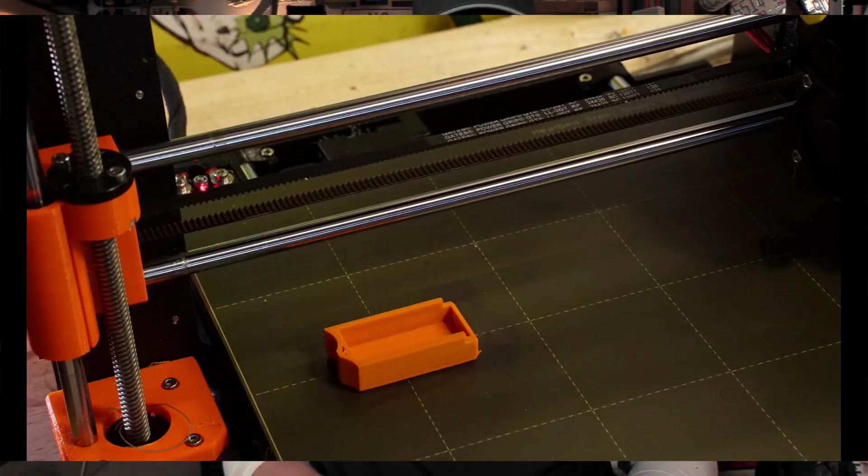We are going to be making a rig, some 3D printed parts to do time-lapse photography of your 3D prints. That is showing a build of your 3D prints without the extruder head in the way. Whether or not you've seen this, it's pretty fascinating stuff. Some of my favorite YouTubers are doing this.

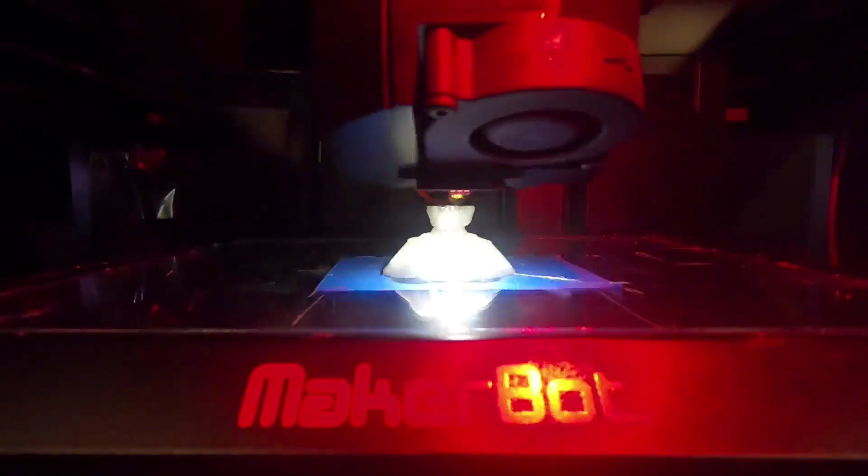So normally what you do is you take a Raspberry Pi. This is a Raspberry Pi 2, and this is a Raspberry Pi 4. You load Linux on it with a little tiny SD card, and you run something called OctoPrint. Today we're going to be doing this without all that, just using some 3D printed parts made in Fusion 360. So let me show you how it's done now.

So let me get to the point. We have three different objects that are printed. We have a top adapter that goes on top of the X extruder, which has a pin.

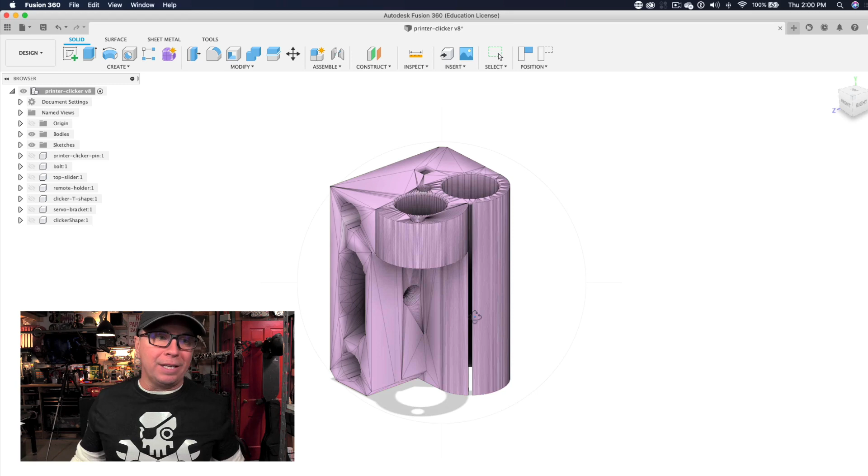We have another holder that holds your remote control on your right or your left. And we have a sacrificial object that our printer will go over to and print and click the button. So you don't need OctoPrint or anything else.

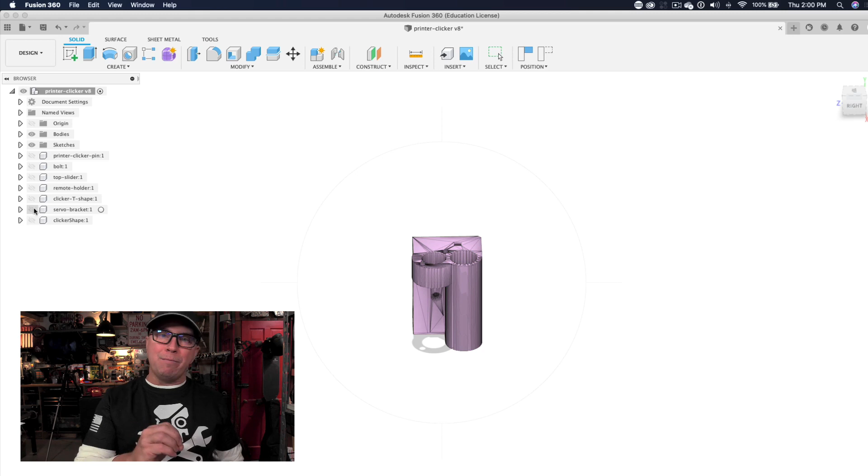The first thing I did is download the actual X gantry part from Prusa, which is in light purple here. It's a mesh, basically an STL that I downloaded, and I designed the actual remote holder based on my Sony SLR camera. I then measured the servo, which is like 42 millimeters square by 40 deep.

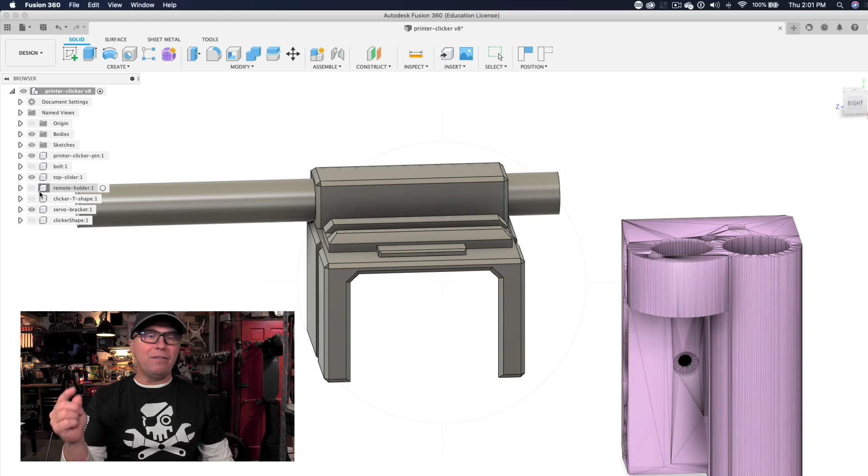I measured that, and I created an adapter plate, which will end up holding the pin that will click the actual remote. I wanted it to be able to position everything up and down in case you have a different remote size. So basically the top slider of the extruder where the pin is slides back and forth.

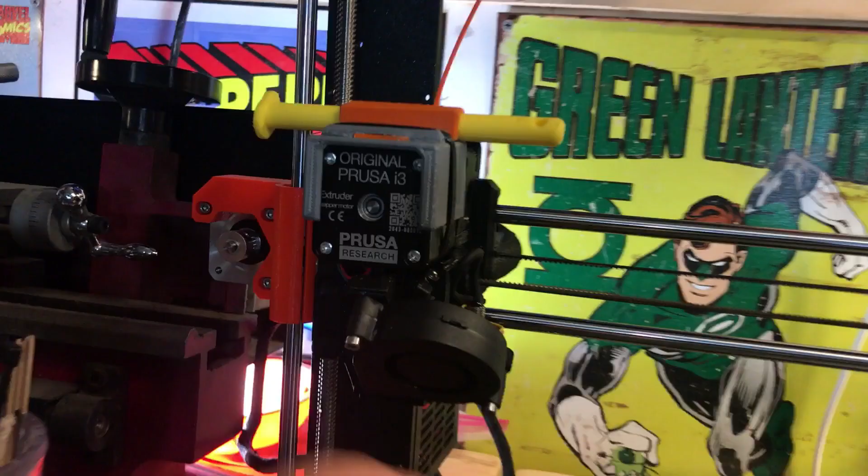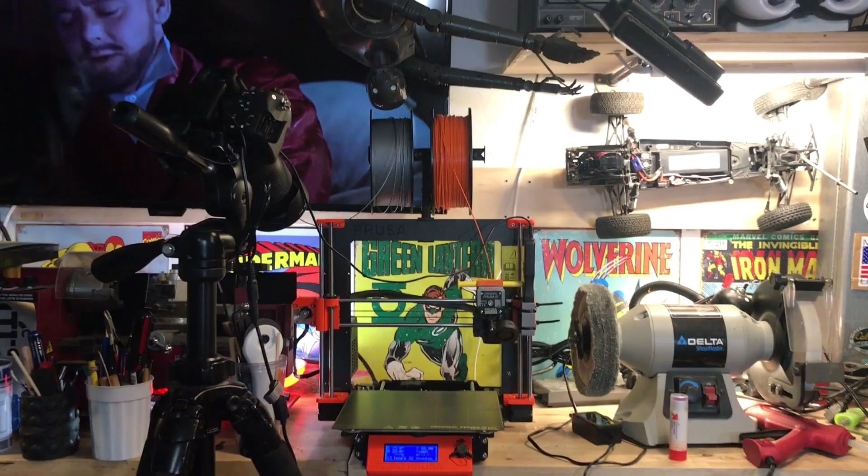And then the actual pin will slide back and forth so that when you're getting ready and doing the first couple layers, you can go ahead and move that pin. You can pause the print and move that pin where it needs to go in order to line up with that remote control. If your remote control is different, you may need to expand this little box.

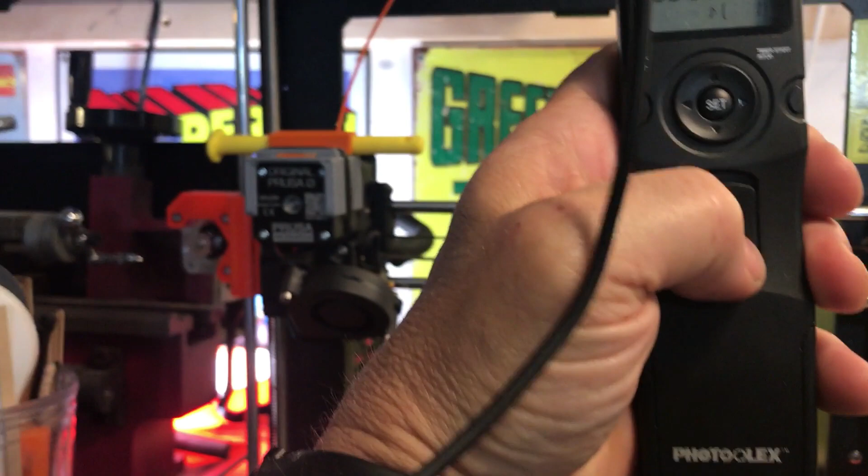And then the sacrificial part, that can be any part that you make. That's the part it goes over to, and it's going to print basically a dummy part. I found that this shape I created, which has a little T at the very end, and has to have a base, works really well.

Also, printing that little sacrificial thing in ABS is important. You can use PLA, but make sure you have a good base, and the first couple images are not going to be part of your time lapse.